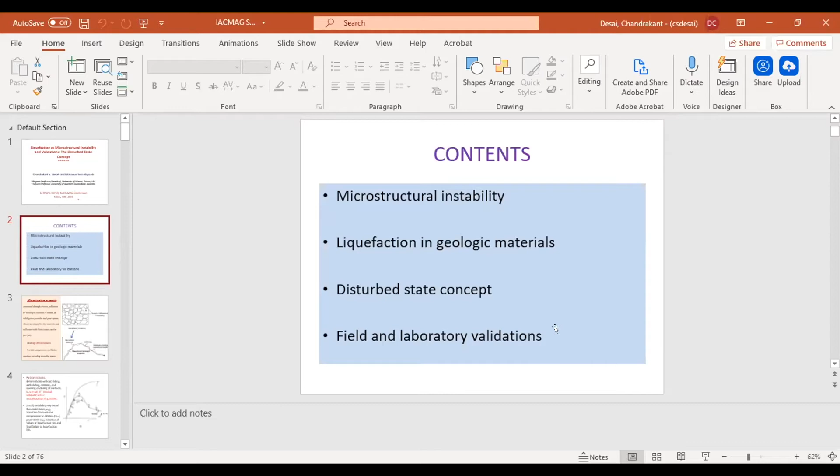I have about 40 minutes, and I will try to finish by that time. I want to divide this into microstructural instability, liquefaction in geologic material. I consider liquefaction as one of the instabilities which occur inside the material microstructure. Then a disturbed state concept, which I have been working on for modeling material and interfaces, and I will present some field and laboratory validation for this approach.

Consider material particles joined together with friction and adhesion, with gaps filled with water or air. When this material microstructure is subjected to loading, in my opinion, this is a guess, the material particle movements are also oscillating, behaving in a somewhat sinusoidal or irregular manner. What we measure outside in the laboratory test is the average of that oscillating behavior.

During this time, those oscillations sometimes become spikes and breaks, and instability occurs. All instabilities do not cause failure or liquefaction; only some of the instabilities cause liquefaction. For instance, here we have a stress-strain curve, and somewhere here, what I denote as disturbance, volume change occurs. That is a sort of instability, but it doesn't cause any failure or liquefaction.

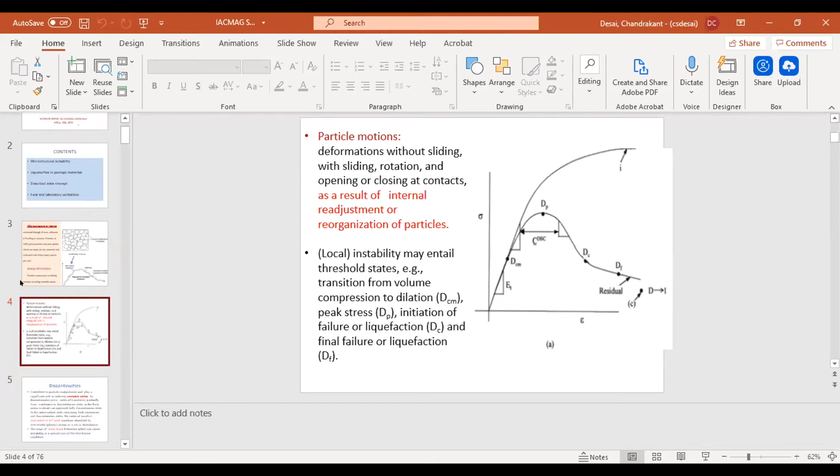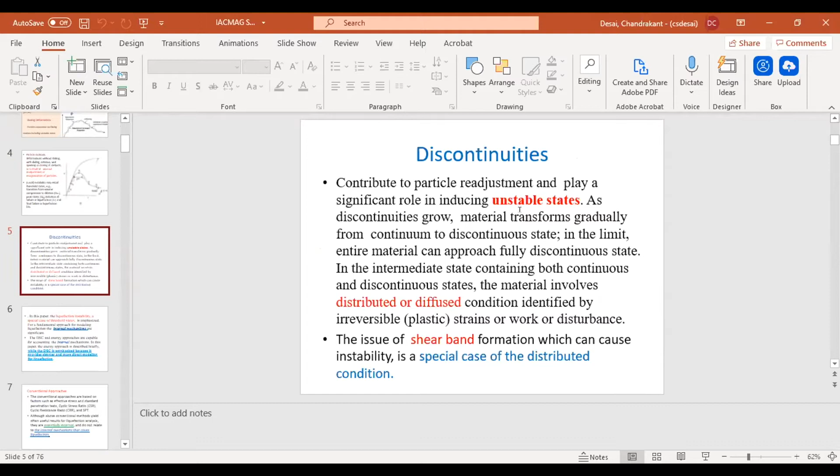The distinct material contains not only particles but also initial and induced discontinuities, and these discontinuities also participate in inducing an unstable state of the material. In this paper, we will concentrate on liquefaction instability as a special case of this threshold state, which I consider an unstable state. For a fundamental approach to modeling liquefaction, the internal mechanisms are significant. The disturbed state concept and energy approaches are capable of accounting for the internal mechanisms.

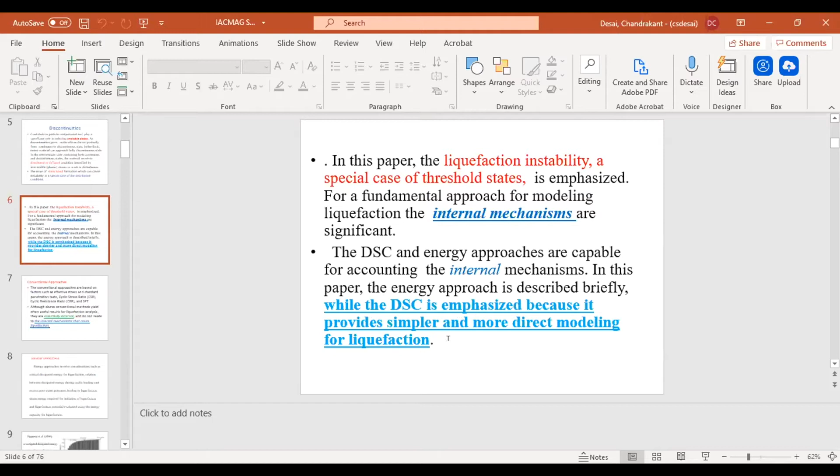In this paper, we'll briefly describe the energy approach, but we emphasize the disturbed state concept here because it provides simpler and more direct modeling for liquefaction.

I mentioned in the beginning the conventional approaches developed by a Berkeley group, Professor Seed and everybody. Those are based on, for instance, standard penetration tests, cyclic resistance ratio, but although they are useful, they are essentially external and do not relate to the internal mechanism that causes liquefaction. They are external—you touch the material externally and say what is happening, but inside what is happening requires fundamental consideration.

So energy approaches have been used and they are basic, like DSC, but they are somewhat difficult to compute, in my opinion, for liquefaction.

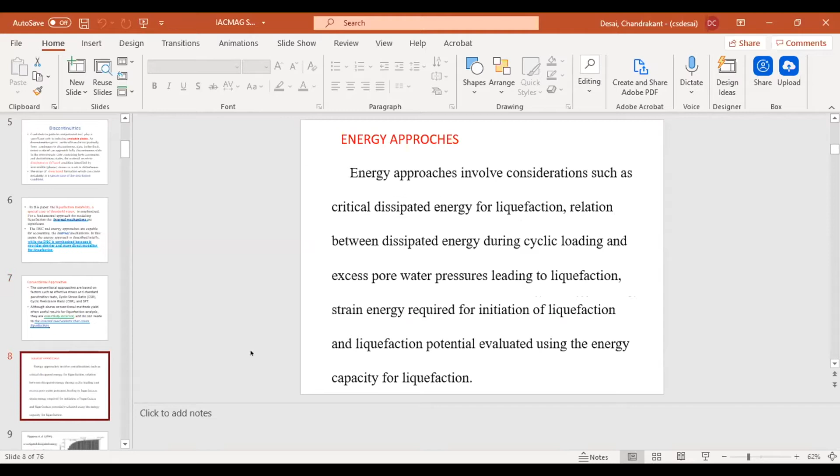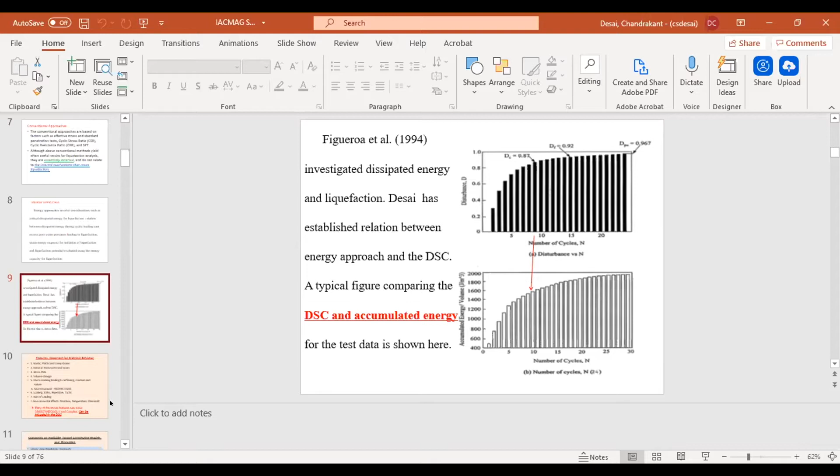And many conventional models don't do that. They address a specific factor, one or two, while disturbed state concept can allow all these factors, including microstructural instability.

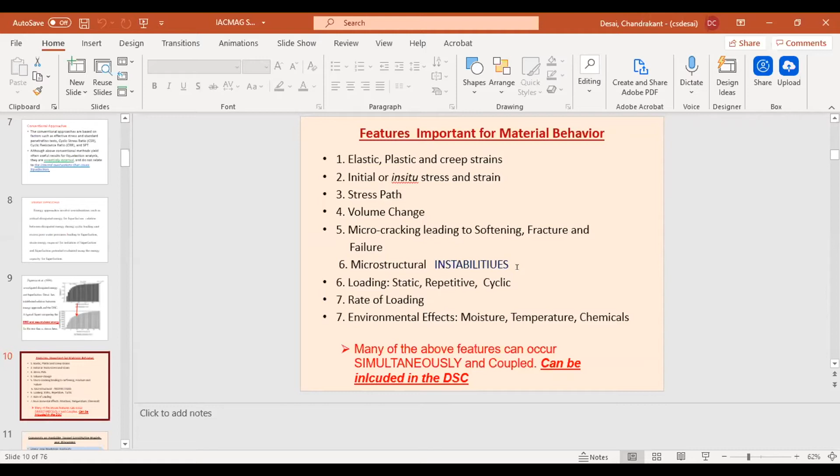There are so many models: elasticity, plasticity, creep models, and I will discuss briefly hierarchical single surface plasticity, which is integral to the disturbed state concept, and also micromechanics—some papers are there, fracture.

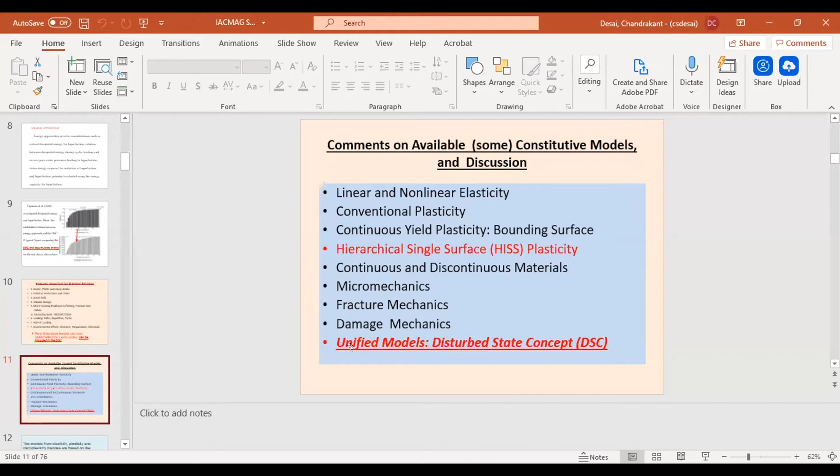But all of this has some limitation, and we think that this disturbed state provides a unified approach for... okay, let me skip some.

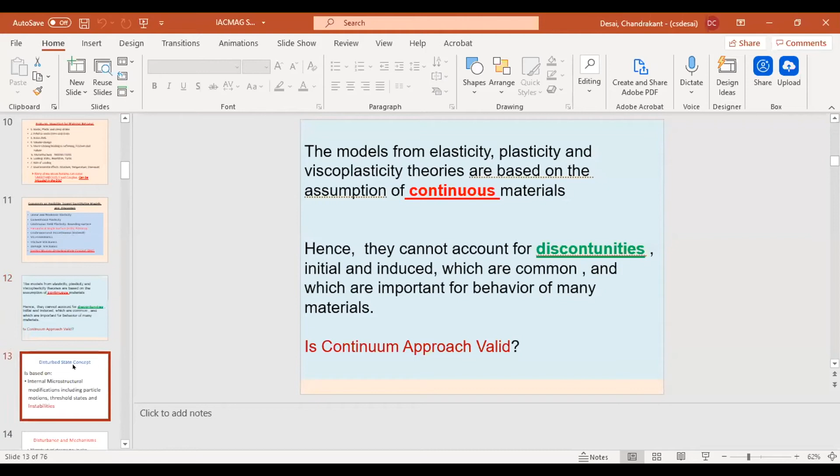As I said, disturbed state concept is based on internal microstructural modification, including particle motion, threshold state, and instability resulting—that is captured by the disturbed state concept.

In brief, microstructural changes may involve directional microcracking, but it can be defined in an aggregate and weighted manner. So disturbance in the disturbed state concept represents, in a weighted sense, the effect of microstructural modification such as instability—in a weighted sense, not a directional or vectorial sense.

Through irreversible deformation, or strains, or work—plastic work.

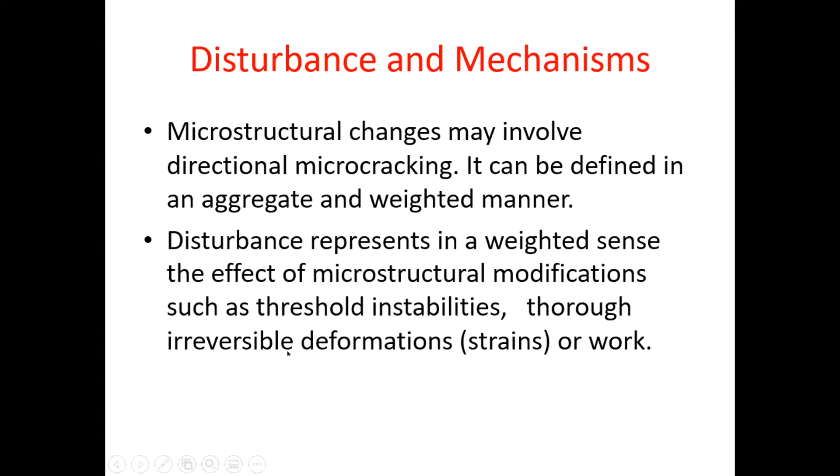I don't want to go too much into it, but in my book on disturbed state concept, I discussed this in a philosophical sense. In Chinese philosophy, and in Indian philosophy, material behavior in the universe is composed of two systems: something exists, something doesn't exist. But they exist together and merge, combine with each other. In the same manner, material behavior can be composed of continuum and discontinuum, like existence and non-existence, which are coupled together and can merge into each other.

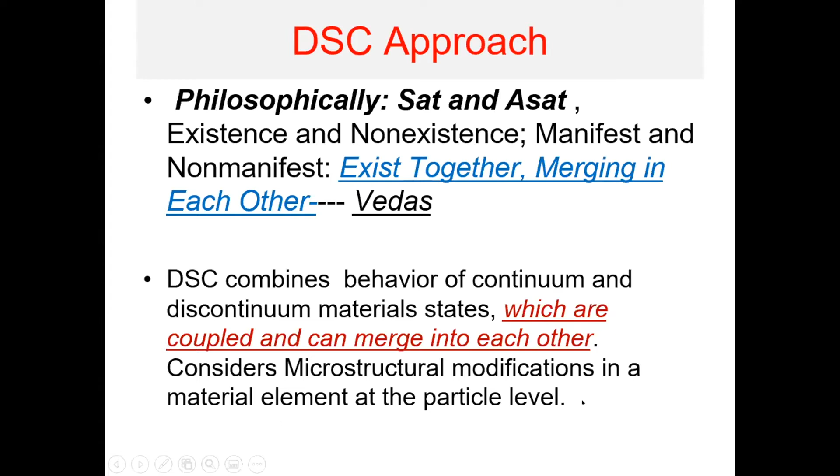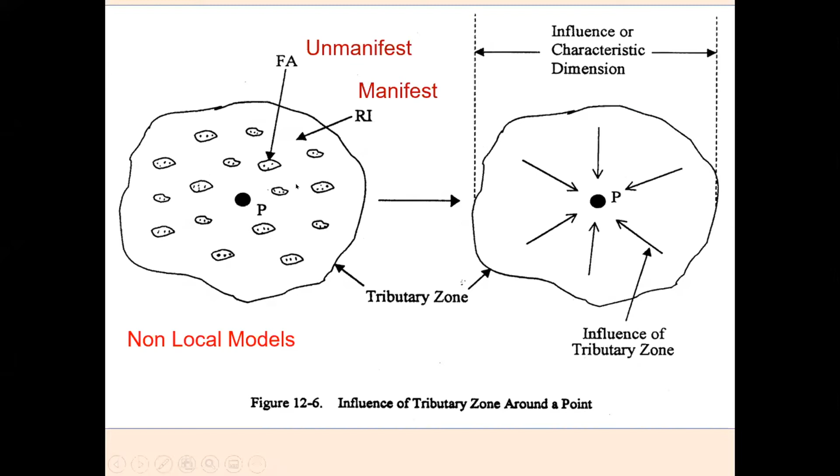And that is based on microstructural modification at the particle level. Sometimes in continuum behavior, we define stress at a point. But when a discontinuum material occurs—discontinuity occurs, micro-cracking occurs, damage occurs—at that point that definition is no longer valid, because the behavior at the point is also affected by what is happening in the neighborhood. So in disturbed state concept, the stress is defined in that manner, in a weighted sense, affected by what is happening surrounding it.

I don't want to go into it, there are so many other methods. One of the advantages of the disturbed state concept is that its main mathematical framework is applicable to both solids and interfaces and contacts. You don't have to define it mathematically another way—both can be defined by the same mathematical framework. And this is a unique and significant advantage.

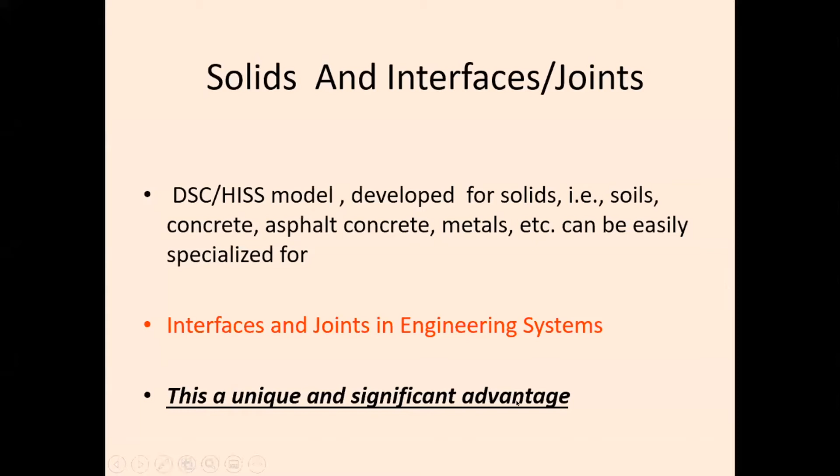The basic idea, as I mentioned philosophically, is that material is composed of a relative intact continuum state, whose behavior is manifested, meaning it can be measured, and a fully adjusted state when the material goes from the continuum to the total discontinuum or disturbed state—that is called fully adjusted. So the behavior of the material in disturbed state concept is defined in terms of the behavior of the relative intact continuum part of the material and the discontinuum, or fully adjusted, part of the material.

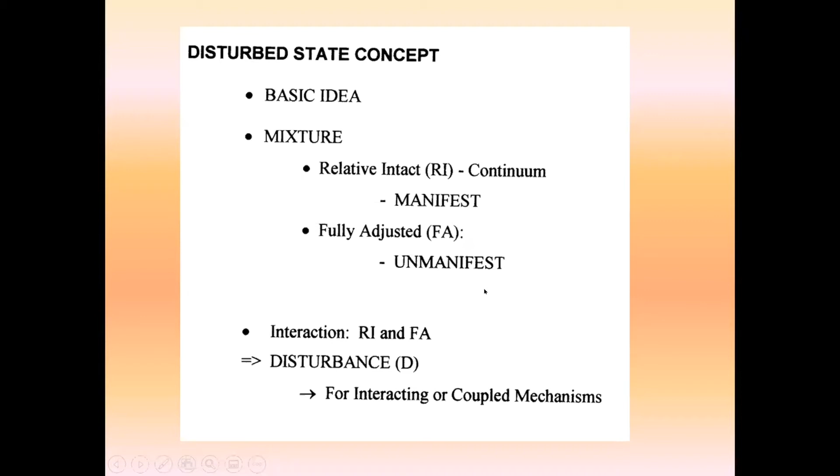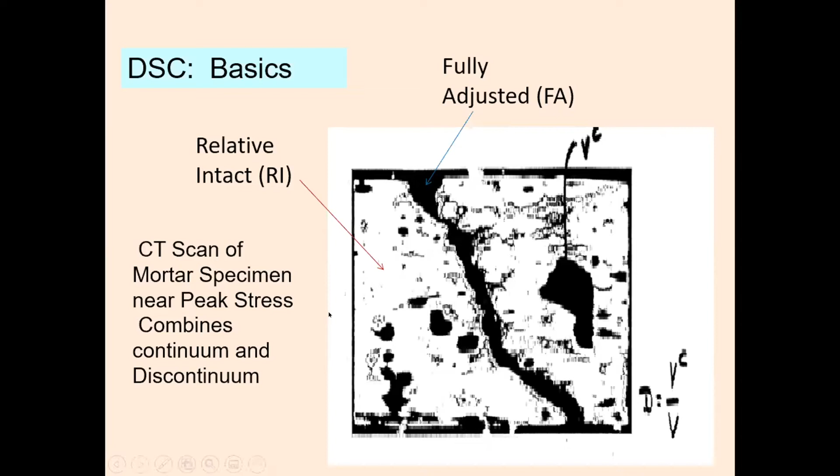The behavior of this material can be defined using the relative intact, or continuum, and fully adjusted parts, if you can define it. We have found that disturbance can be defined as the volume of material in the black state divided by the total volume of the material, and that is the disturbance. That relates to the internal behavior. In a stress-strain curve, the behavior looks like this.

Disturbance is the difference between the relatively intact continuum part and the actually observed behavior. There are two reference states: continuum RI behavior and fully adjusted behavior. Between these two reference states lies the observed behavior, which can be expressed in terms of the behavior of the continuum RI state and the fully adjusted state. This is a very simple physics principle.

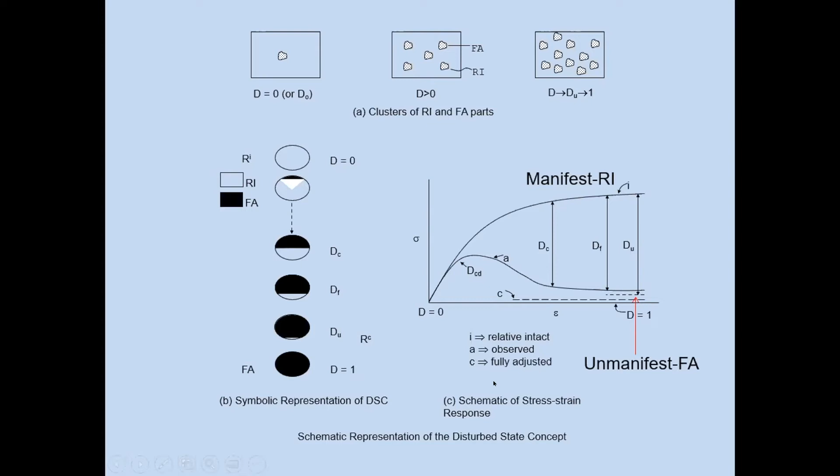The behavior of a mixture can be expressed in terms of the behavior of the components of the mixture. That is a basic, simple principle.

Stress is now defined not only at a point, but in terms of the disturbance: stress in the continuum part, stress in the discontinuous part, and the extreme stress for the critical state and the intact state. If disturbance D is 0, this represents continuum behavior. But if the disturbance is not 0, then it takes care of the discontinuities, and also failure or liquefaction.

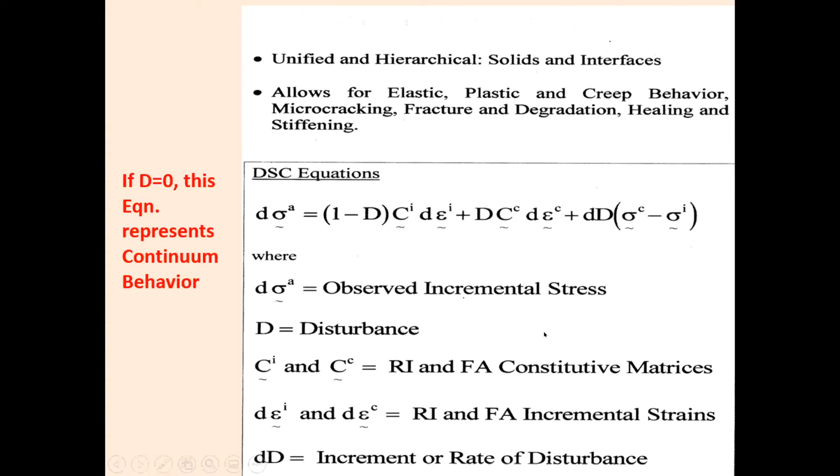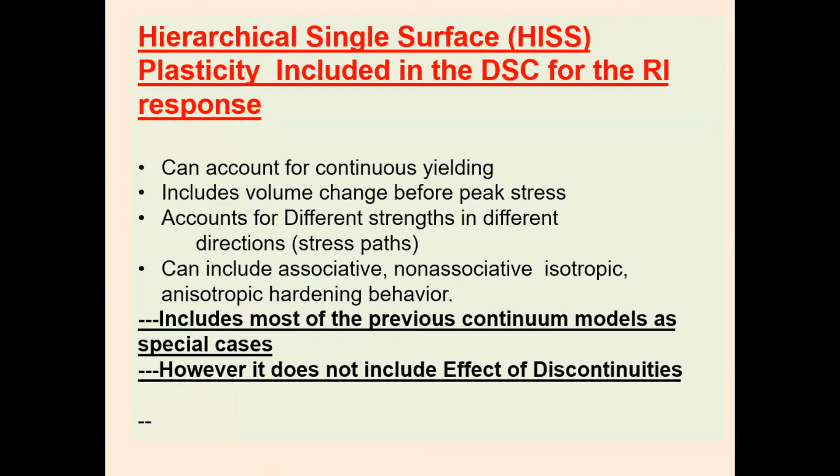The hierarchical single surface plasticity can be used as one of the models for the RI behavior. That model is described by the yield function in terms of the invariants of the shear behavior and mean stress, and a number of parameters. This model is so general that you can derive all the conventional plasticity models like Mohr-Coulomb or Drucker-Prager, and critical state, from this behavior depending on the parameter values alpha, gamma and beta.

So this is a general plasticity model which can be used for the behavior in a continuum, hierarchical single surface continuum sense. I cannot go into details because of time limitation, but this behavior includes critical state as one of the special cases where phase change occurs.

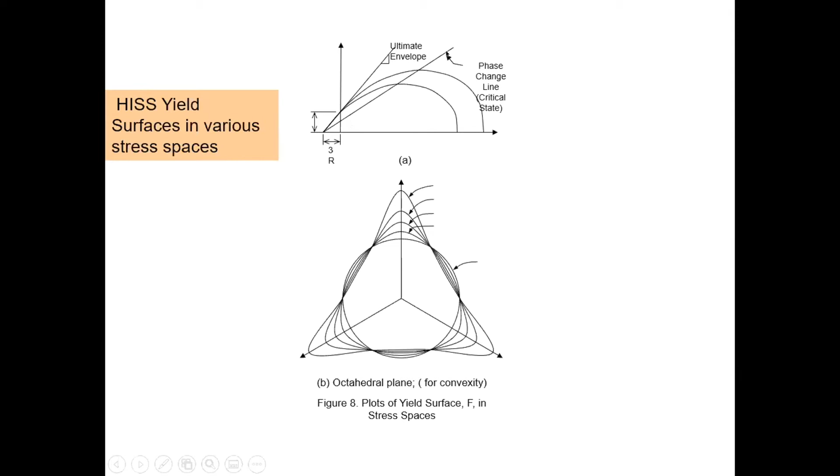For the fully adjusted state, you can assume it has zero strength, but that is not good. It gives uncoupled behavior. You can assume something like a bulk modulus, as in classical plasticity. This is like a damage approach. It is not good because it doesn't give consistent behavior.

Like classical plasticity, you assume the fully adjusted state defined by the bulk behavior. Or for critical state, you can define it just like in the critical state model. You can find in partially saturated soil, the saturated state as a reference.

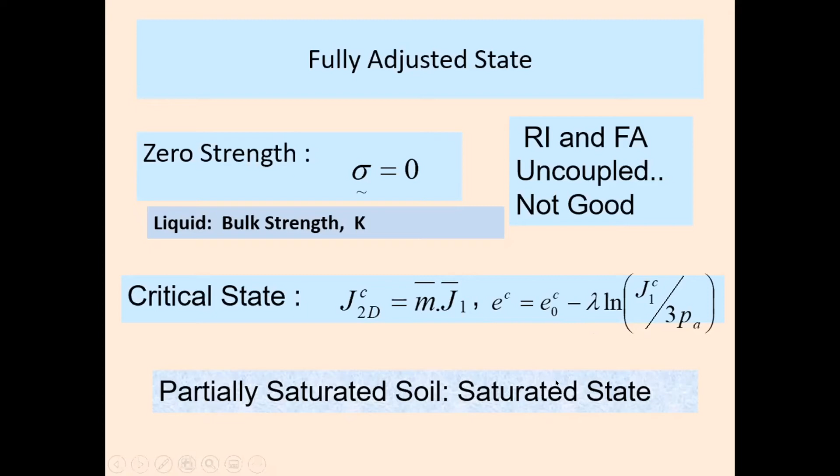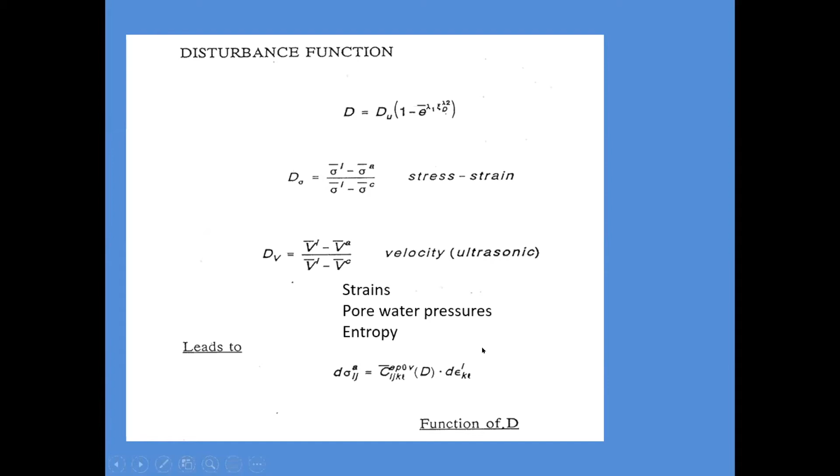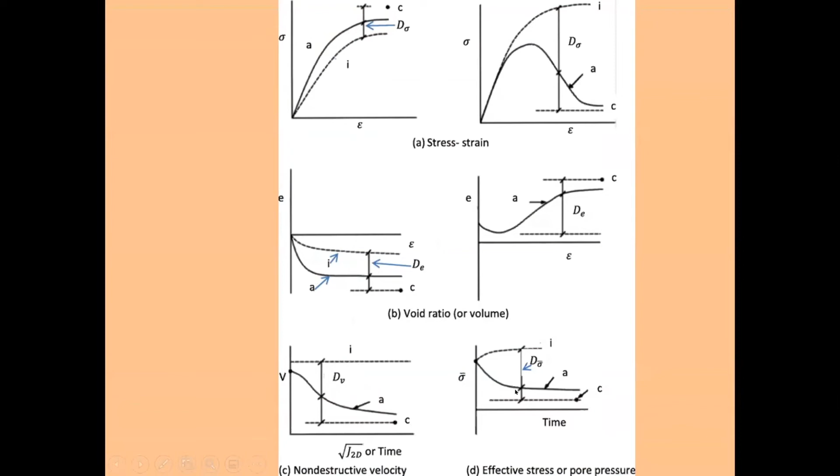Disturbance can be expressed in terms of the stress-strain behavior, ultrasonic or non-destructive velocity, or just strain or pore water pressure in a saturated material, or in physics, entropy. It has been done by all these methods. Disturbance can define entropy, and for instance, stress-strain behavior, volume change behavior, ultrasonic velocity, shear velocity, or pore pressure behavior. You can define disturbance in this sense.

Also in cyclic behavior, it can be defined as intact behavior and observed behavior, and the critical state here is where liquefaction occurs in cyclic behavior.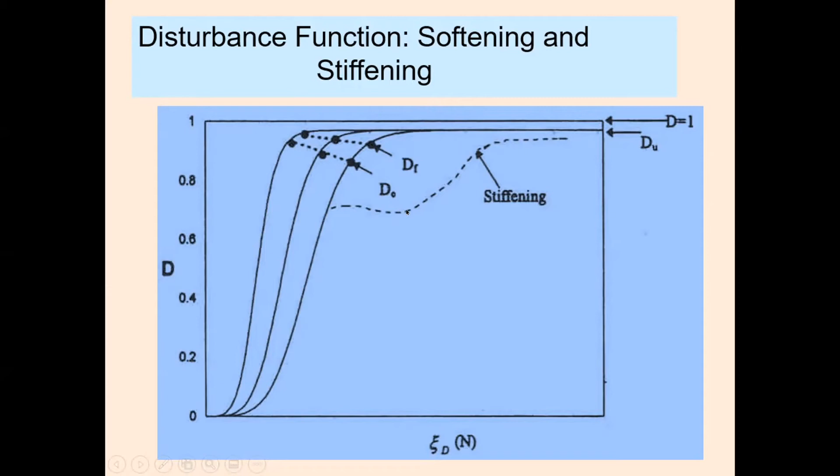And stiffening behavior—I forgot to mention, but the disturbed state concept also considers stiffening behavior. Sometimes material, because of temperature or chemical reaction, stiffens rather than softens, and that is also considered in the disturbance.

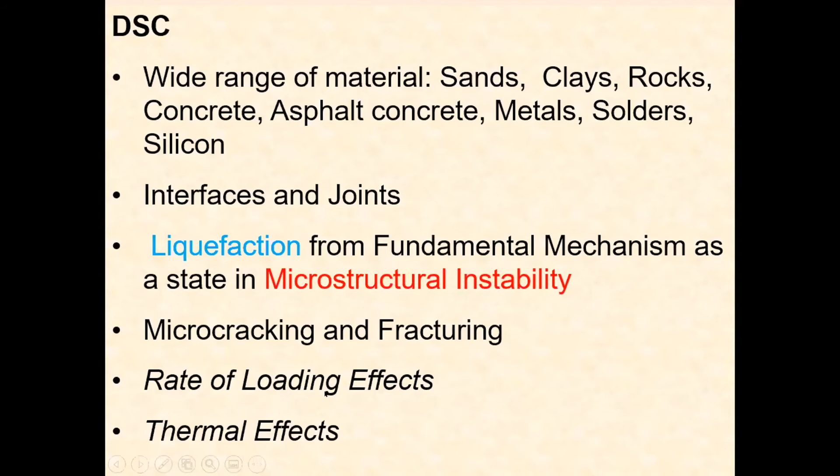Very briefly, I want to go to the capabilities of the disturbance concept. It can be applied to a wide range of materials: sands, clays, rocks, asphalt, metals, solder, silicon, interfaces and joints, liquefaction, microcracking and fracturing in the context of finite element analysis, rate of loading effect, thermal effects, repetitive loading, and interface behavior.

You find almost the same type of mathematical equation for stress, for joint or interface behavior, in which the material system between the materials in the thin layer is also considered to be composed of solid and porous parts.

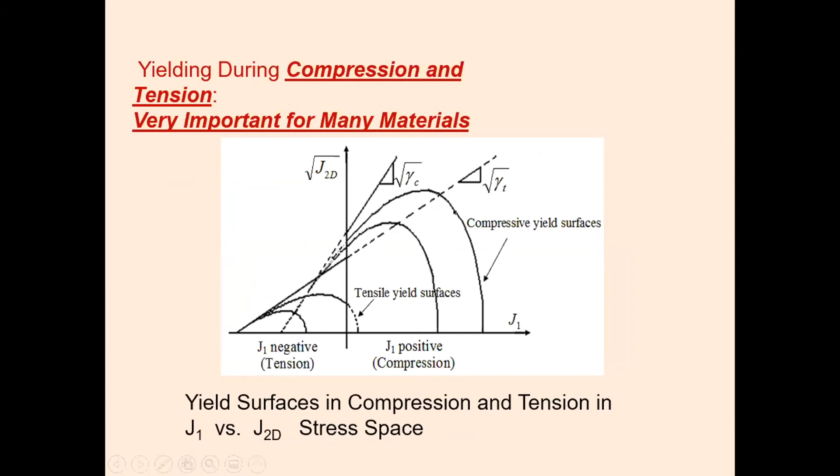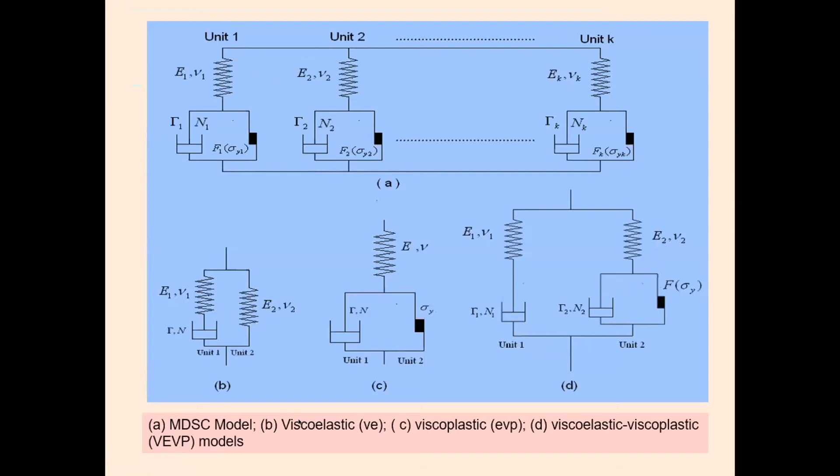You can consider both compression and tensile conditions in a hierarchical model. You can have creep behavior through multi-component DSC models. All the viscoelastic, viscoplastic, or viscoelastic-viscoplastic behaviors can be included.

Laboratory testing and validation are very important factors. I won't go into detail, but we have developed some new laboratory testing devices.

For the disturbance function, there are 12 parameters. But with these parameters, this model can account for almost all the exhibited behavior compared to any other model. You can read the literature—we have a lot of papers and a book.

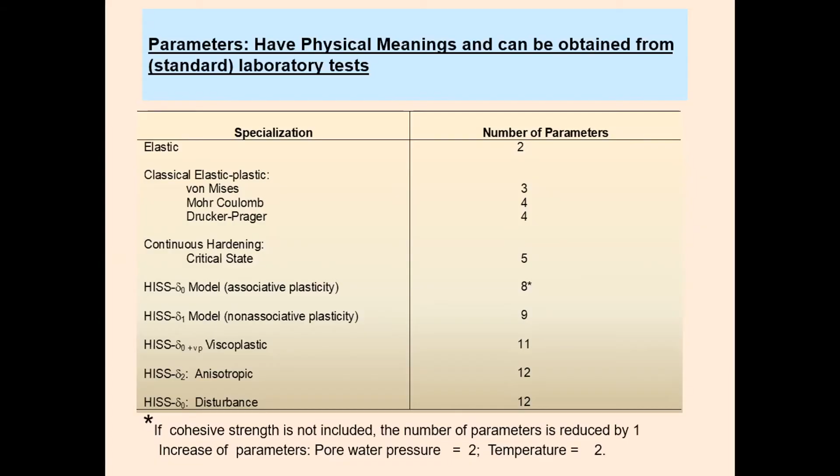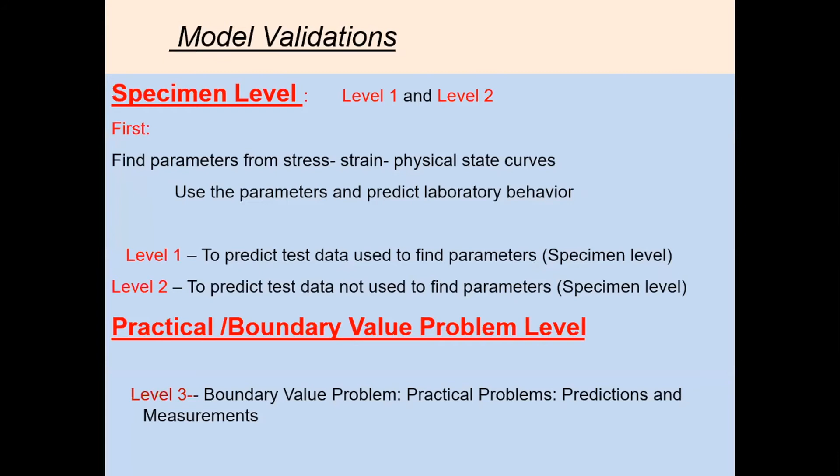Validation, we have specimen level and practical boundary level. I'm going to present in the next few minutes liquefaction application for a few typical examples.

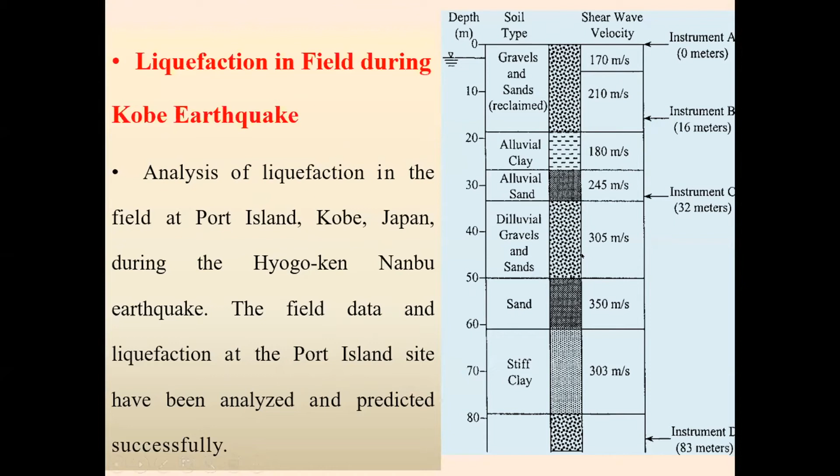First of all, the liquefaction in the field during the Kobe earthquake. This is a soil profile near the Kobe earthquake. One of the things that happened is that before, during and after the earthquake, they measured the shear wave velocity on the north-south part and east-west part. So we use that shear wave velocity to define disturbance.

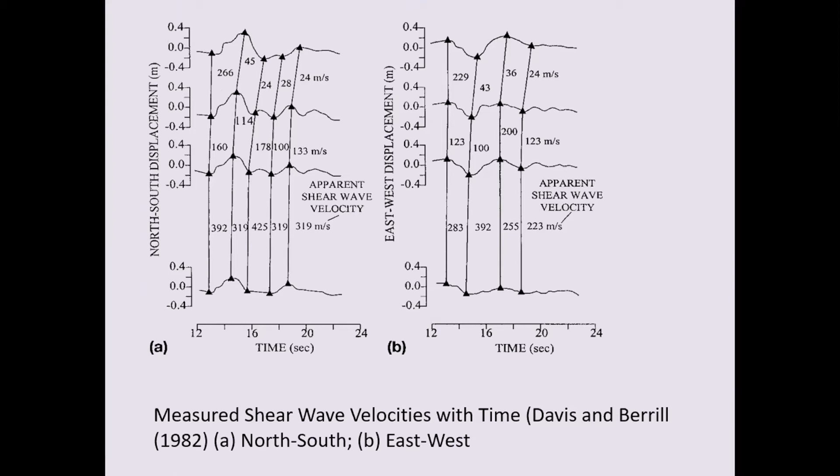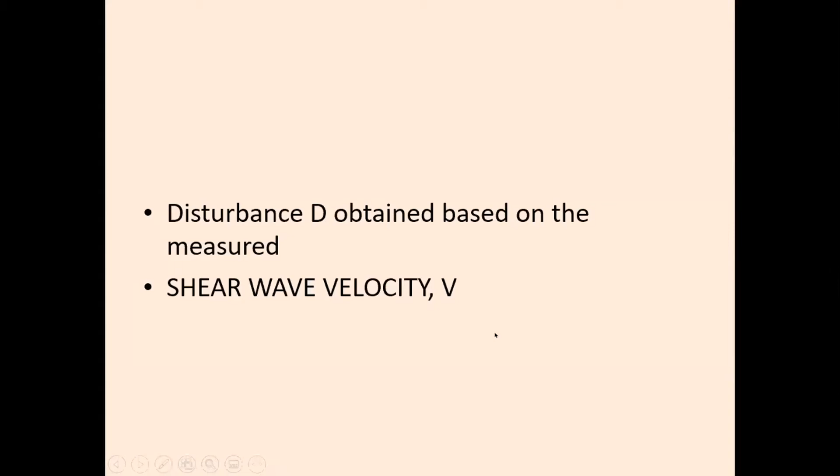So disturbance D was obtained from the measured shear wave velocity in the field in the Kobe earthquake. If you plot the disturbance with time, you can see at different depths, 1 meter, 4 meter, 8 meter, 16 meter, disturbance plots like this based on the shear wave velocity. At 14.6, it reaches a critical disturbance of 0.9, and that is about the same time they observed disturbance in the field. So this critical disturbance liquefaction compares very well with what happened in the field in the Kobe earthquake.

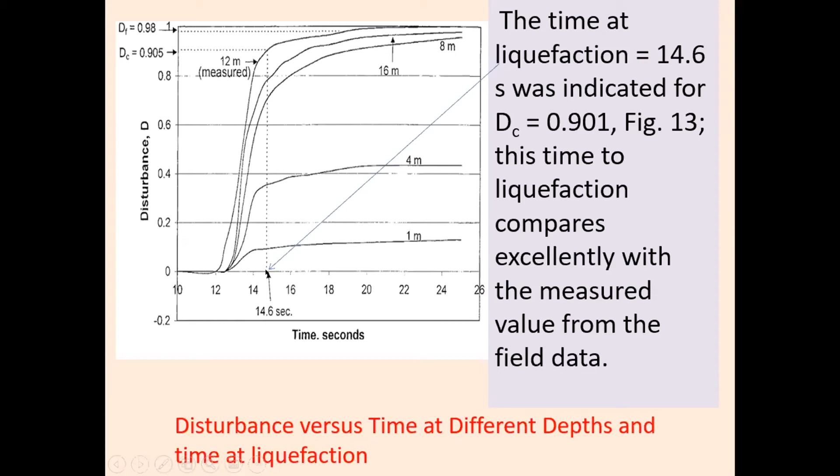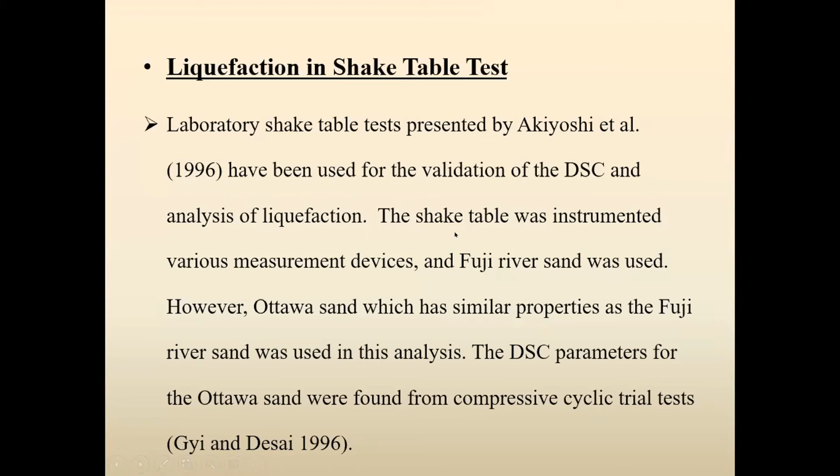Liquefaction in a shake table test. We used a shake table test by people from Japan, Akiyoshi. We used the DSC model to analyze the liquefaction in the shake table test, which was a finite element method. This was the finite element mesh, and it was instrumented by various accelerometers and pore water pressure measurement. We considered the pore water pressure at this measurement point, and subjected the bottom to the same type of cyclic sinusoidal load as was done by Akiyoshi in the laboratory.

And we found that, at that point, the excess pore pressure versus time, this was measured by Akiyoshi in the laboratory, and this was computed by the DSC model. Somewhere here, after 2 seconds, liquefaction has occurred. That was observed in the lab.

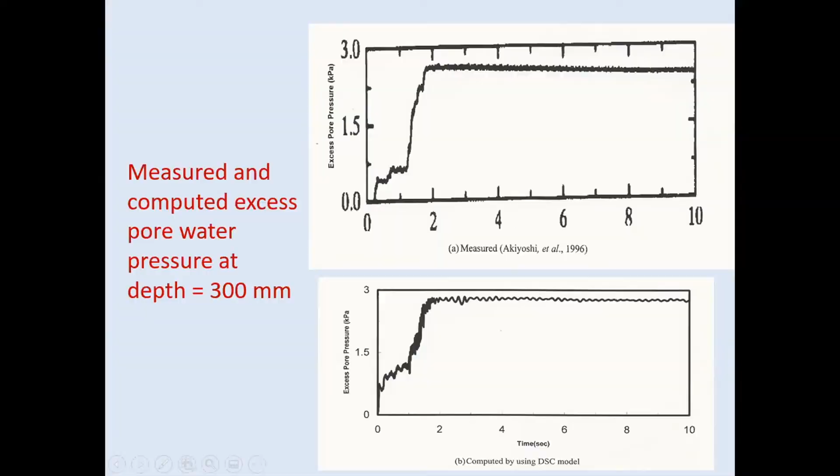You can plot the disturbance contours during the finite element analysis. This is 0.5 seconds, 1 second, 2 seconds, and 10 seconds. At 2 seconds, almost 0.85 or 0.95% of the sand reached the critical disturbance, and they measured that liquefaction occurred. At 10 seconds, the whole thing collapsed with final liquefaction.

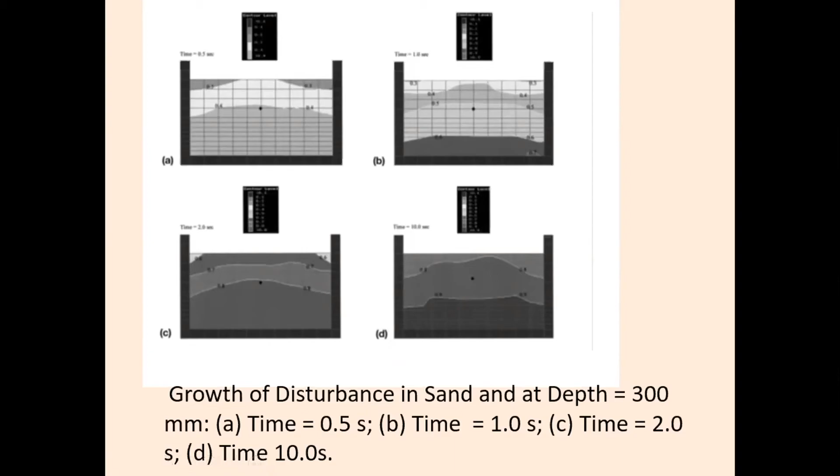In Korea, Park and his group conducted comprehensive monotonic cyclic simple shear experiments on Ottawa sand and steel interface. This is what we did in the laboratory, liquefaction on rough interfaces, and this is very interesting. The rough interfaces also can liquefy, which is interesting, and sometimes interface material can liquefy earlier than liquefaction in the surrounding material.

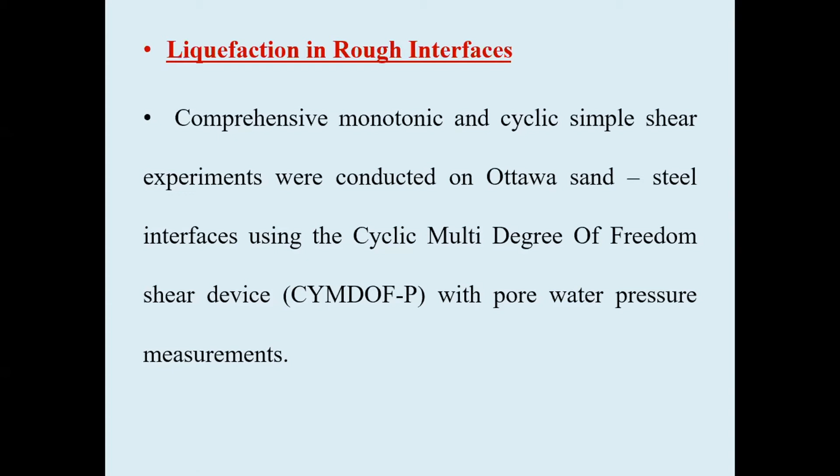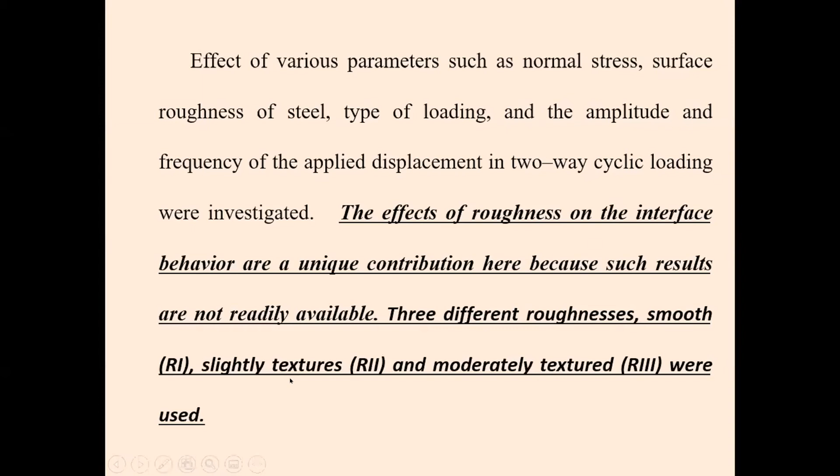So the effect of roughness on the interface behavior is a very unique contribution here. We considered 3 roughnesses: smooth, slightly textured, and moderately textured, and used this device to measure the pore water pressure by putting a transducer here. The interface behavior for different roughnesses was measured in the laboratory.

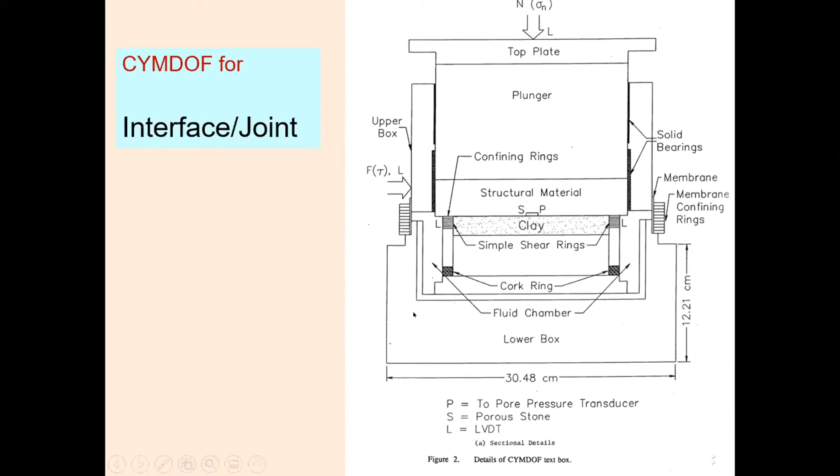I don't want to go into the details. There are 2 papers published recently in the International Journal of Geomechanics and IACMAG. You may look at it. It is by Desai and my co-author, Muhammad Al-Yunis.

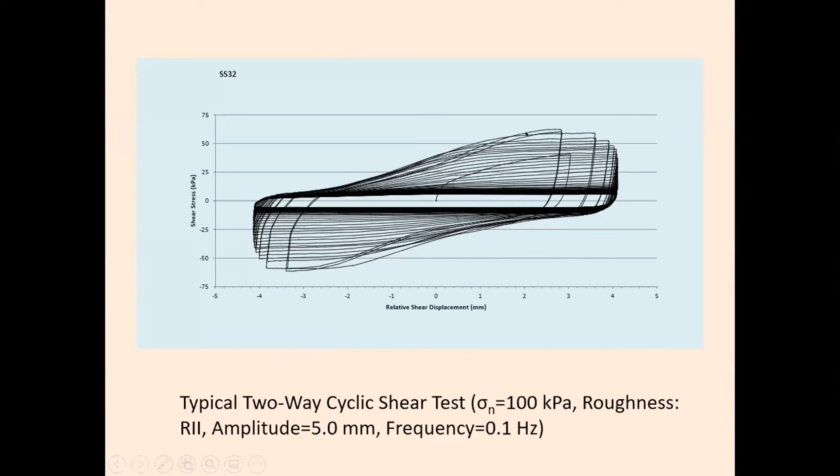You can see shear stress and relative shear displacement which we can compare with the DSC model. The only thing I have done here, I don't know if you can read it, but we compared the three different roughness tests and the time for liquefaction in the laboratory: number of cycles to liquefaction, critical disturbance, and time for liquefaction measured in the lab is 2600 seconds, while the DSC model gives 2614. So it was a very good comparison for different roughnesses.

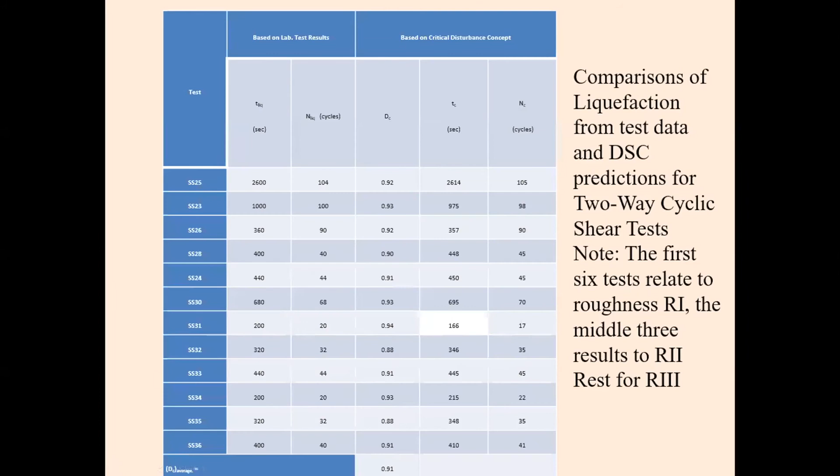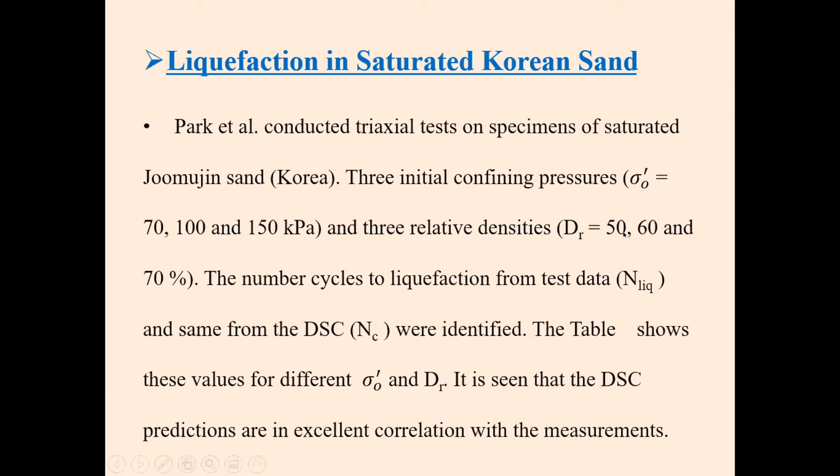Okay, this is liquefaction. Park et al. conducted a liquefaction study on saturated Korean sand with different relative densities and confining pressures. They also found that the number of cycles to liquefaction from the DSC model, for instance, were 18 for an initial confining pressure sigma 0 prime of 70, and the number of cycles to liquefaction in the laboratory stage were 19. So this is a very good, excellent comparison for different relative densities.

I think I will, how much time do we have now? 2 minutes? Dr. Donatelli? Yeah, 5 minutes, 10 minutes. Okay, that is enough.

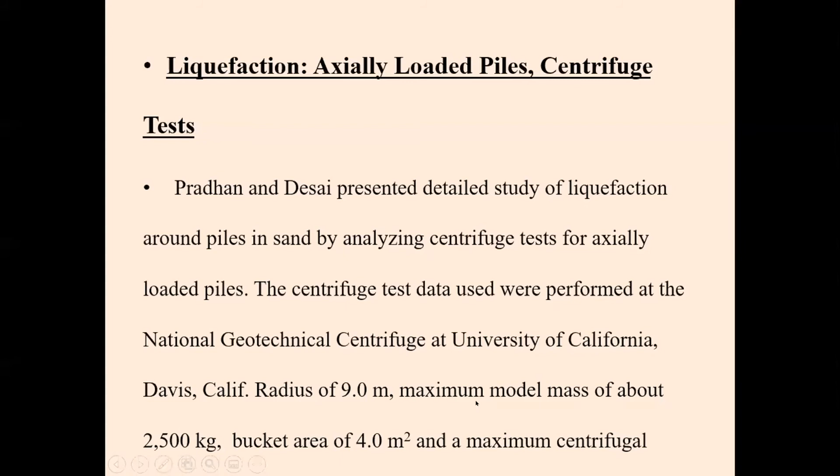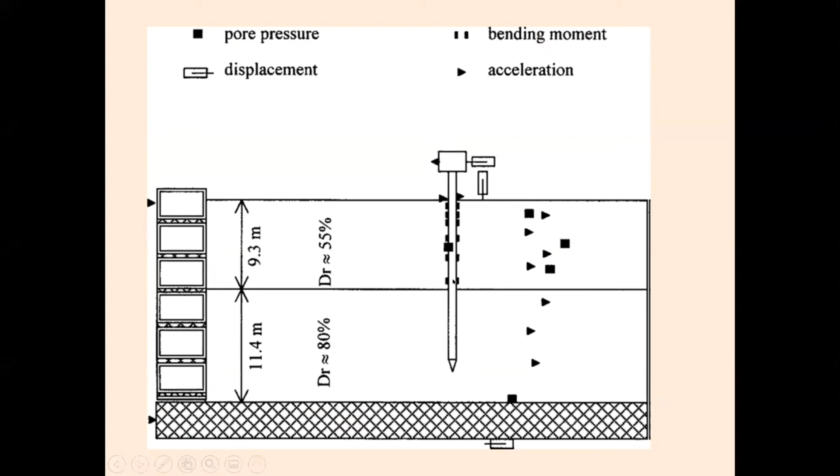So in this disturbed state concept, the HISS model was used for the sand tested in a laboratory at Davis. We found the parameters and the loading condition for the pile from the centrifuge test data, and then applied that and computed displacement, pore pressure, everything at various node points and elements.

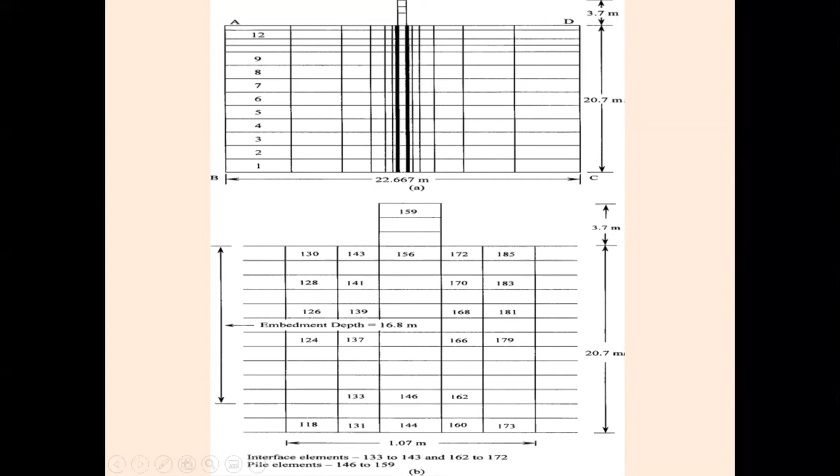Now, interface behavior is very important. I did not consider the detail, because with and without interface, there is no comparison of pore water pressure. But with interface as a mathematical model in the finite element, the pore water pressure behavior was comparable to what happened in the laboratory.

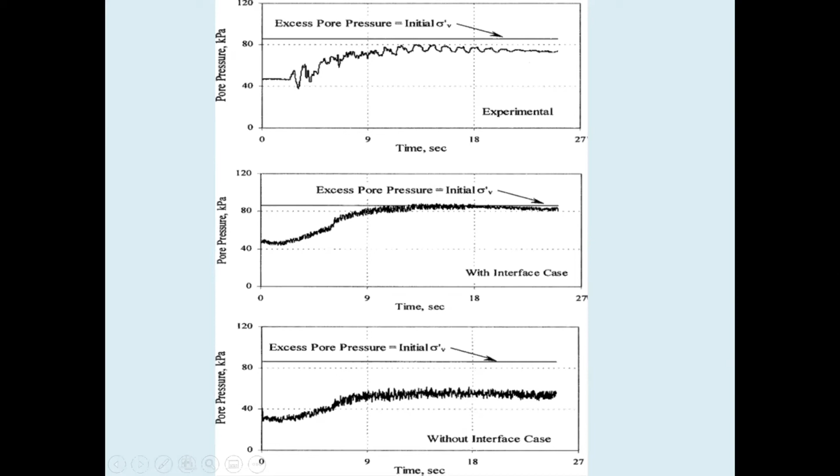And somewhere here, at 9 seconds, liquefaction occurred. And these are some comparisons between various elements, and liquefaction according to the Seeds method, effective stress method, and the time to liquefaction according to the disturbed state concept.

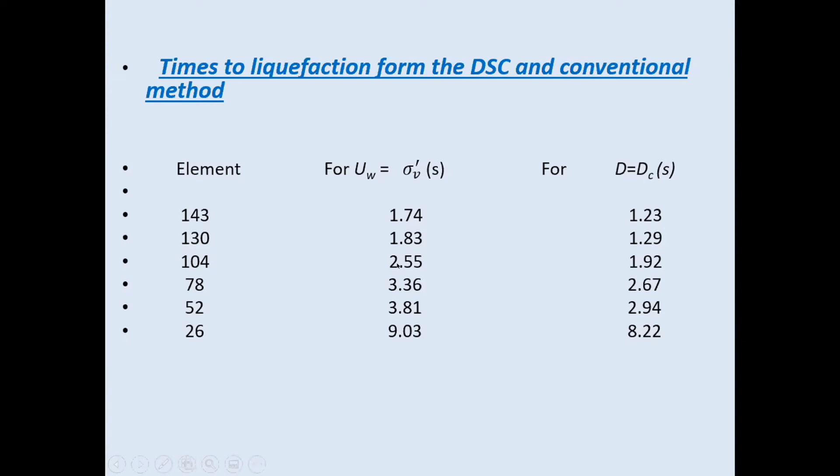You can see that the time to liquefaction by disturbed state concept is earlier than the time to liquefaction by the conventional method, in which liquefaction is identified when initial effective stress is equal to the pore water pressure. So there is a difference between the conventional method and the disturbed state concept.

Now, my last example is a laterally loaded pile, which is quite difficult and not much done. It is a laterally loaded pile in the field by Earth Technology Corporation, a company, done in 1981. We conducted analysis - Essa and Desai, myself, and my student Muhammad, who is now a professor in Iraq, in Basra - using the finite element method and disturbed state concept.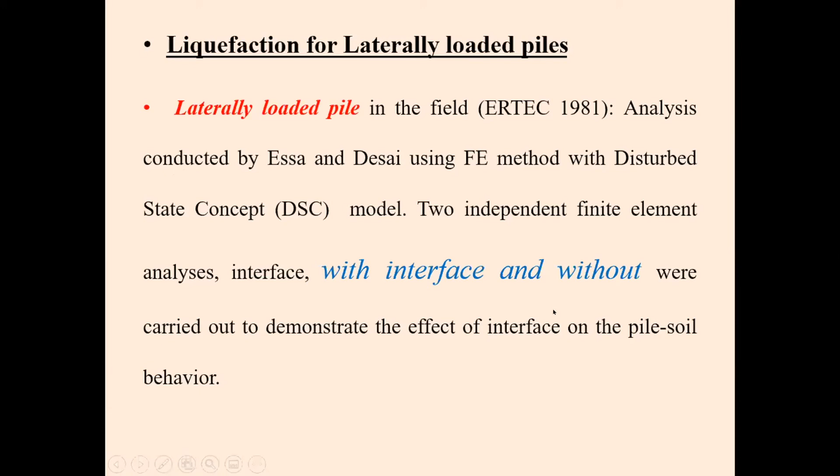Two independent finite element analyses, with interface and without interface, were done. A harmonic sinusoidal wave displacement was applied in the lateral direction at 0.61 meter below the pile top. I will not go into details; it is in those papers.

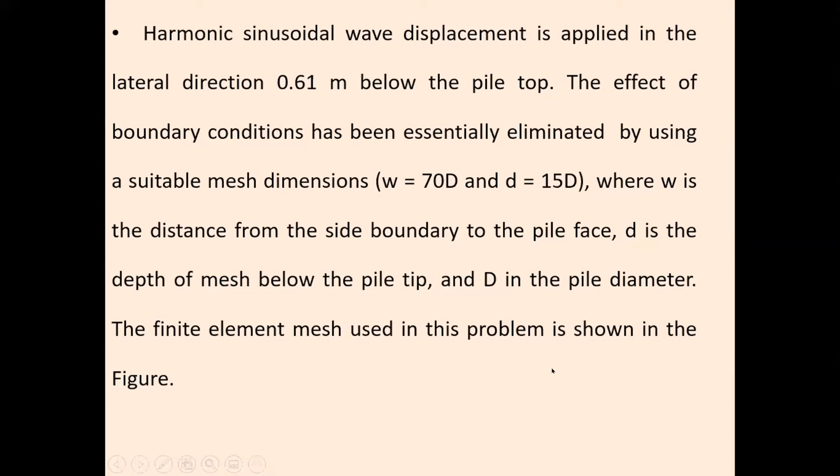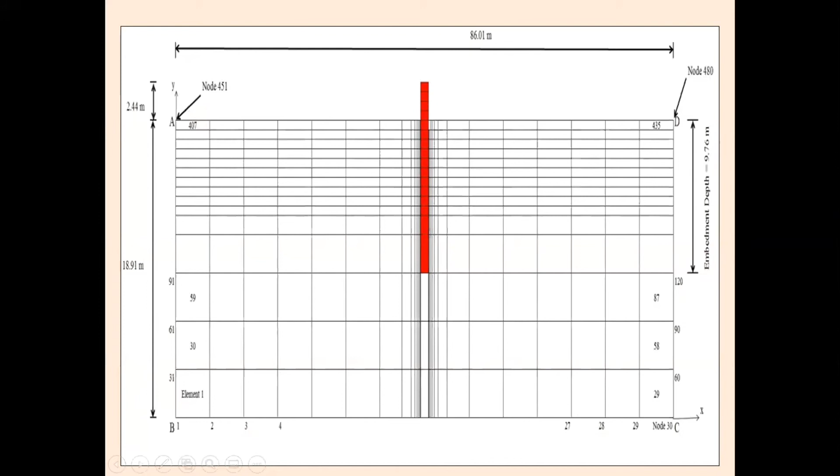This is the pile where the load was applied somewhere here, and this node was placed far distance so that the boundary effect was hardly any. This is a load displacement curve applied in the lateral direction, not axial. Lateral direction is not very easy to find field experimental data for.

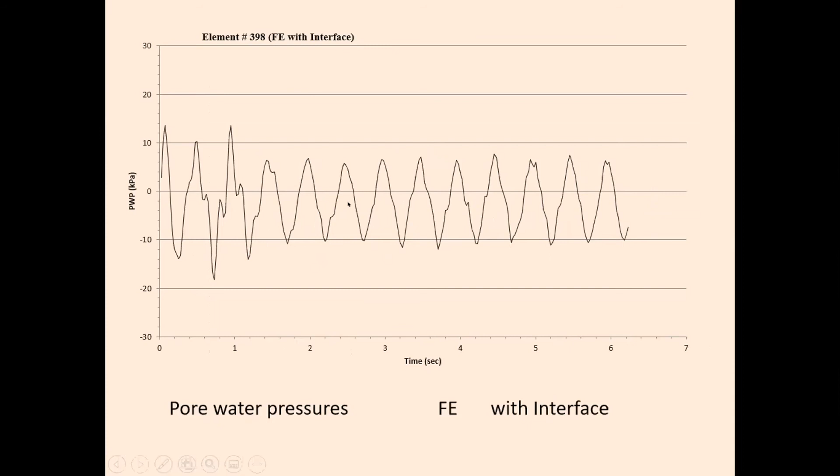Now, when the load was applied at step 204, one peak was there. There was another peak at step 214. So we consider the pore water pressure contours at those two subsequent peaks.

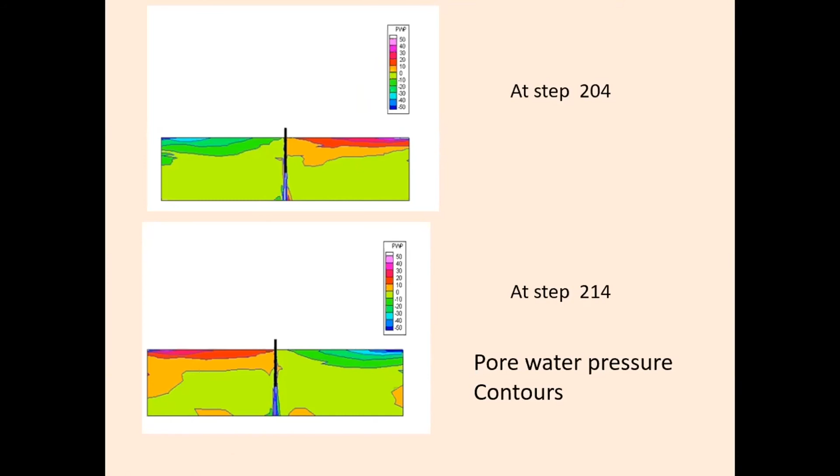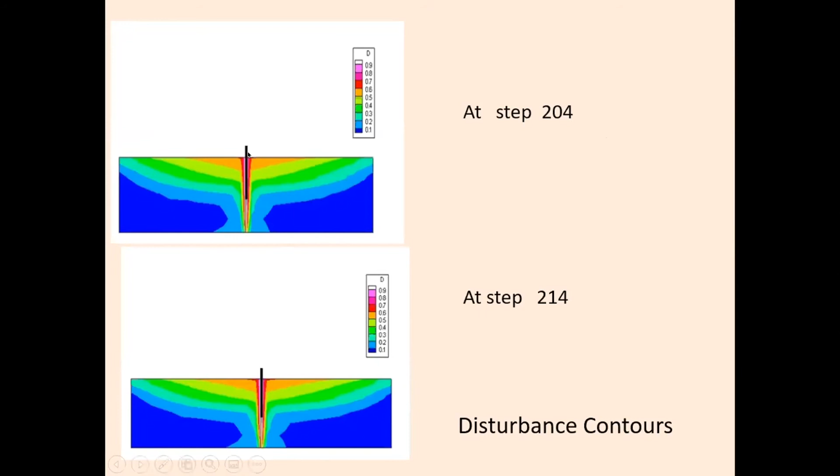I will say the disturbance contours at step 204 and 214 are like this. You can see that around this point, in the vicinity of the pile, disturbance approaches 0.9, which is the critical disturbance we defined from the laboratory test. That is where liquefaction occurs in the lateral load.

Figure at step 214 presents the disturbance contours at the two subsequent peaks. The value of D varied between 0.7 and 0.9 immediately around the pile and gradually reduces in the far regions. The critical disturbance value for Ottawa sand, DC, is 0.84, and for Ottawa sand-steel interface it is 0.91.

It can be concluded that liquefaction occurs around the pile in the shallow soil, and that coincides with the field observation reported by Earth Technology. It should be noted that the DSC allows computation of liquefaction in interfaces also, not only in the soil.

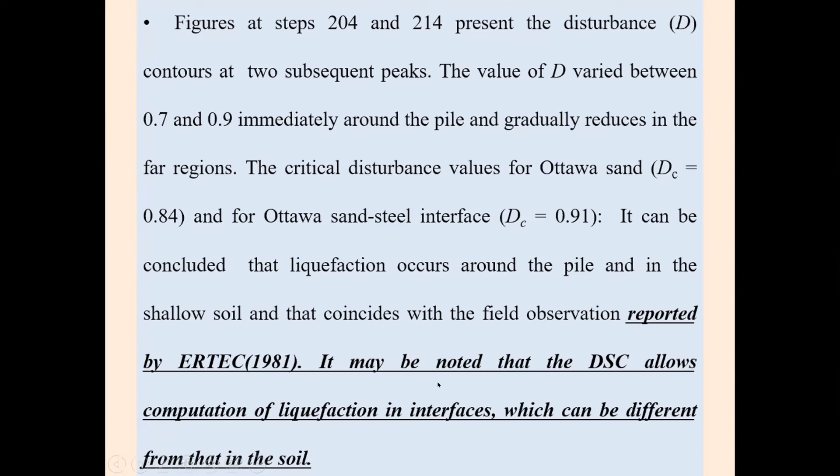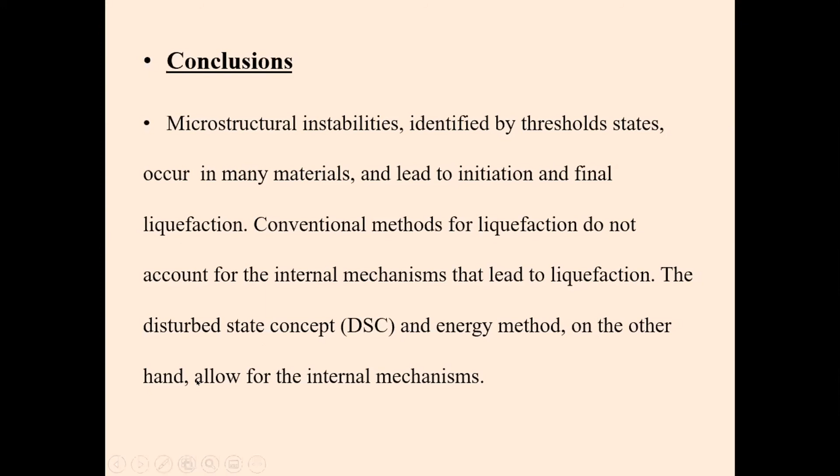Conclusion: microstructural instabilities identified by threshold states occur in many materials and lead to initiation and final liquefaction. Conventional methods for liquefaction do not account for the internal mechanism that leads to liquefaction. The disturbed state concept and energy method, on the other hand, allow for the internal mechanism.

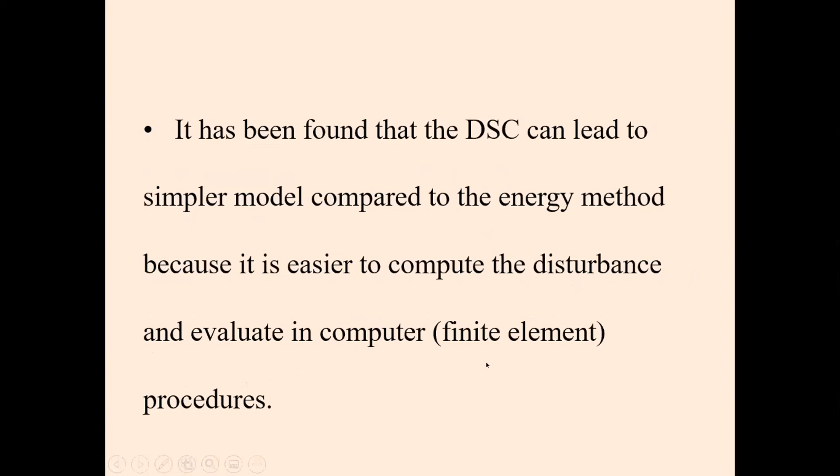It has been found that the DSC, disturbed state concept, with the HISS model can lead to a simpler model compared to the energy method, because it is easier to compute disturbance and evaluate it in the computer finite element procedure. Hence, the DSC is described in detail today, including theory, parameters, and validation. Several validations with respect to field and laboratory simulation of practical geotechnical problems are presented in this paper.

It can be concluded that the DSC is perhaps, not always, the only fundamental, unified, and easier procedure for liquefaction analysis. It can be used in practice by evaluating critical disturbance for standard tests and by using the computer finite element method. Thank you very much.

What does TORINO mean? TORINO is like the water of its rivers, an evolving city, constantly moving. TORINO means a community of people, using the city as a living lab. TORINO means ideas feeding companies and creating startups, traveling fast along streets, data and connections, in a virtuous circle of minds, research and innovation. TORINO means innovative spaces, a city growing stronger, discovering new uses and generating shared facilities. TORINO means culture, surprising heritage and captivating flavors, seducing thousands of people every day. Torino, a city with endless possibilities.